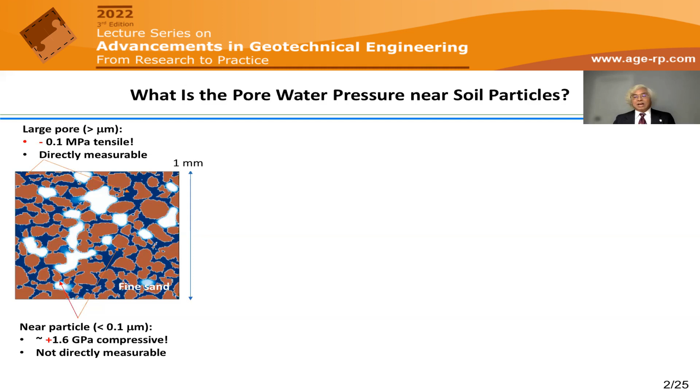But if we look a little closer to the particle surface, what I'm talking about is the scale less than 0.1 micrometer, things are very different. There, the pressure could actually be very high and compressive, and it really doesn't matter whether it's saturated or unsaturated, the pressure is in a region that is tremendously compressive. And the most difficult part now is that it's not easy to directly measure.

Now I'd like to give you some perspective about the magnitude here. On the compressive side, I'm claiming that the pressure could actually be very high, 1.6 gigapascal. So let's get an idea about how big that is.

If you look here, I illustrate it as a Mariana Trench under the ocean. We know that the deepest a vehicle can go is around 11,000 meters. So the pressure there could be very tremendous if you imagine being there. To put it in scale with Mount Everest in the Himalayas, which is 8,848 meters, even though that depth is below the ocean, the pressure is still very high. How big is it? Let's do some simple calculation using hydraulics.

The water pressure that we all define and use is basically, below water under hydrostatic condition, the unit weight times the depth. In this case, unit weight of water times the depth, which is around 11,000 meters, gives us about 108 megapascal.

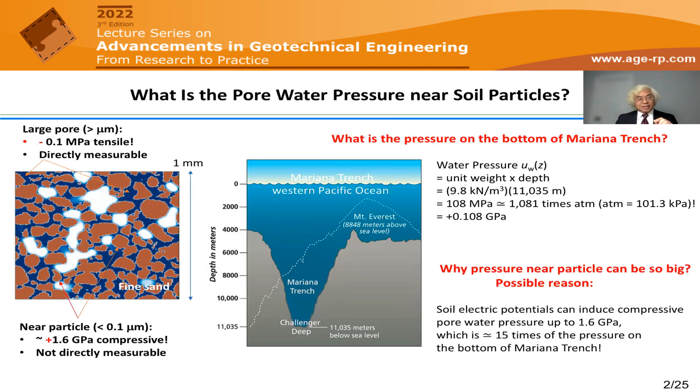So what I'm saying is that if you go out to your garden and take soil with moisture, the pressure near the particle surface - it doesn't matter whether it's saturated or unsaturated, silty, sandy, or clay soil - could be as high as 15 times more compressive than the bottom of the Mariana Trench.

So we wonder, why is that? I'm going to explain to you today, and why bother - what are the practical challenges? I'll give you a group of practical challenges that we are all facing today.

The first is, when we talk about soil, we deal with fundamental physical properties. Evidence in the last century has shown that the density of water in soil could be very high, much higher than unity. How high? The evidence shows it could be as high as 1.8 grams per cc.

That means 1.8 times as heavy as free water. This causes a lot of important issues in how we calculate things, for example how we calculate the volume of water.

The other thing is soil water cavitation. We know water, like many other materials in our near-Earth environment, exists in three phases: solid, liquid, and vapor. Water is the only material that can change so freely near our Earth environment - it can turn to ice, melt into liquid, or vaporize into vapor.

So it's important to know the transition - one important one is called cavitation, which means a change from liquid to vapor, and the reverse process is called condensation, where we go from vapor to liquid.

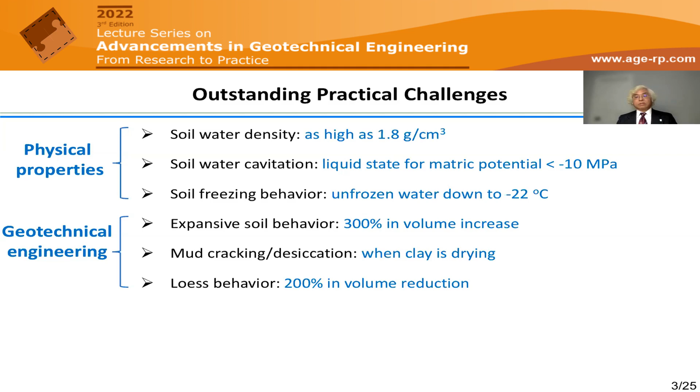The other very important topic is loess. Loess is a yellowish, porous soil widely spread around the world. Sometimes we call it collapsing soil, because upon wetting, the volume can reduce dramatically. Those are the issues that are very important and relevant - in fact it's about pore pressure, and we have not been able to truly tackle the issue from the pressure point of view.

And what we have done is from the conventional point of view to define the pore pressure. The other category I put, just as an example, is the so-called geoenvironmental, which relates to environmental problems. We're concerned about how the water is going to move in soils, in rocks, particularly in clay soils.

Because in clay soil, we have, in addition to conventional flow, a larger surface area, which causes chemical adsorption, physical adsorption. The water not only moves in the larger pores under Darcy's law, but also moves around the soil particle surface, sometimes called film flow.

Biological activity in soils: we know that any kind of bacteria, germs, living beings need a certain kind of pressure and temperature. The pressure we conventionally use in the larger pore may not necessarily be relevant to the real condition at the bacteria scale, the living being scale, which they're very concerned about. That pressure is what we'll talk about. It could be up to a gigapascal.

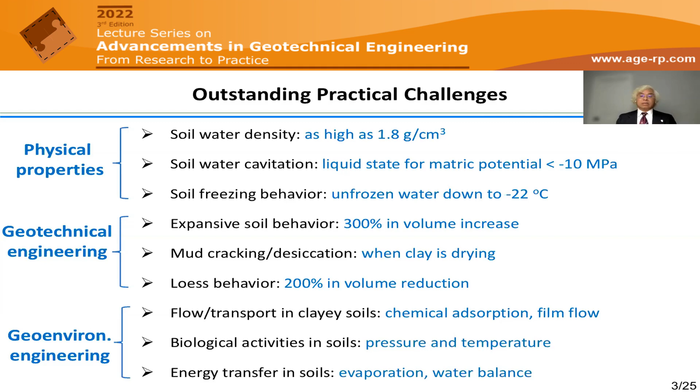Energy transfer in soil, another example: how water energy transfers between atmospheric and subsurface among the soils, evaporation, transpiration, and water balance. So all those are actually very much related to the pressure in soils.

If we look at it more fundamentally, the challenge here is we want to describe the state we have in terms of engineering practice, in terms of natural environment. Most commonly, we use temperature, pressure. In the case of unsaturated soils, conventional thinking is suction, and I'm going to show you that's not always true.

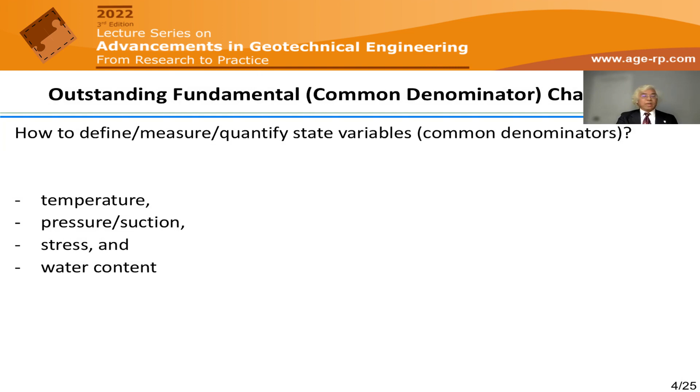Even under unsaturated condition, it could be compressive. And stress, we're concerned about total stress, the stress in the soil skeleton, which we call effective stress. How we assess effective stress also relates to the pore pressure and the water content. In many cases, the soil's state is determined by water content.

So I'm listing three basic fundamental issues that we still, to a great extent, struggle with. The pressure and pore water pressure, or water pressure - what we talk about is water pressure is pore pressure. Positive for saturated and negative for unsaturated, that's the conventional thinking right now. And I will show you today that thinking is actually not general. I wouldn't say wrong, but it's not general.

Stress, matric suction - this is one of the things that has been widely used as a stress state variable for matric suction, and how to define matric suction and measure it from the practical perspective. Suction stress, effective stress, and how we can define it, because effective stress is the one we call effective stress - basically it's effective to describe both deformation and strength.

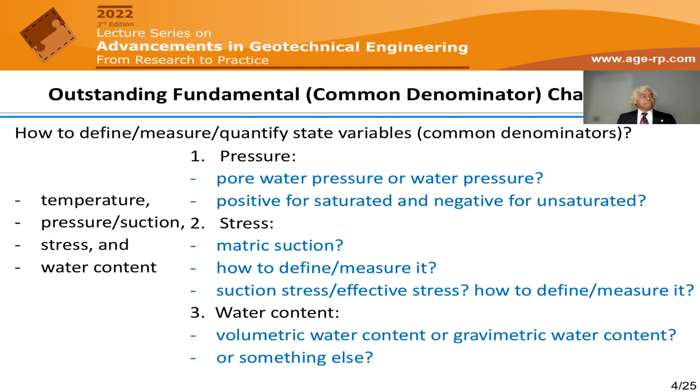So water content - again, water content - we conventionally use volumetric water content, or we can use gravimetric water content. Which one's better? Or maybe you have to use something else. So those are the fundamental challenges.

So let me now go back to what we are doing today, to make it clear how we define the conventional pore pressure. From there, we can look at what will be the better way to do that. So what I show you here is a very typical soil. Soil is a system with solid and liquid, and in some cases could also have air.

In the case of saturated soil, what we traditionally, conventionally measure uses the so-called piezometer. We can insert the piezometer into soil under saturated condition. Likely the pressure here, you're going to see that the head is going to be higher than your atmospheric or ambient condition, so we call it a piezometer. Here I'm talking about hydrostatic condition, no kinetic energy, no movement, just hydrostatic. So the piezometer generally reads what we call compressive, which means bigger than atmospheric pressure.

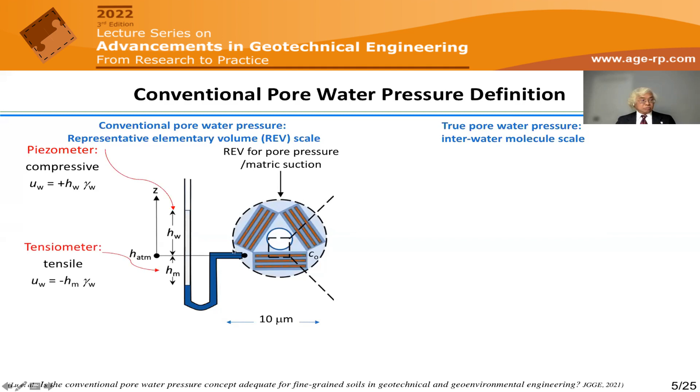Now, if the soil is under partially saturated condition, very often if you measure that, it's going to have a deficit - we call it a tensiometer. This means it's going to be lower than your reference atmospheric pressure. So those are all measurable, at scales greater than, I would say, the micrometer, even tens, 100 micrometers. So we can measure that one. That's how we define the pressure.

But in cases that are much more general, if we have salinity, if we have a solute in soil, we can also measure the osmotic pressure if we put a membrane there - a semi-permeable membrane, which allows the water to freely move, but impedes the salt because of the size of the semi-membrane. In that case, you can also measure the osmotic pressure, because the salt in soil not only migrates from high concentration to low concentration, but also drags the water from low concentration to high concentration.

Conventional pore pressure is the water pressure in larger pores, which traditionally means greater than a micrometer or so. However, what happens in soil, if we zoom down to the nanometer, to the water molecular scale, what we see there is the particle surface.

Near the particle surface, water actually has two mechanisms interacting with it. The first is the adsorptive mechanism, which is due to the influence of the electromagnetic wave by the soil particle, because water is a polar material and will be polarized. Further away from that is what we call the capillary water.

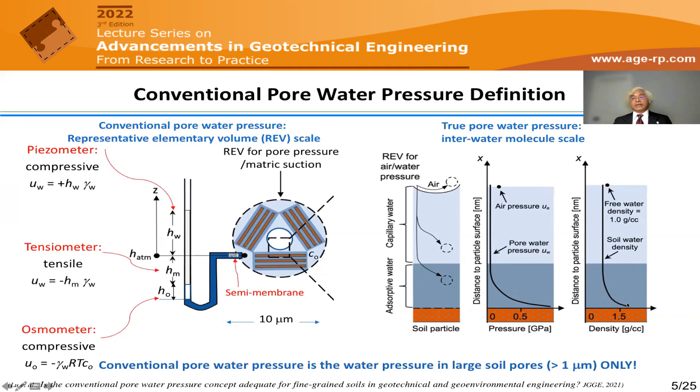Now, correspondingly, because the pressure is so high, reaching the gigapascal scale, the water density near the particle surface - within about 100 to 1,000 nanometers - actually shoots up to be much bigger than unity. In other words, it can go as high as 1.8. So far the experimental evidence indicates this.

What are the difficulties? If you look at how we do this conventionally, again using fine sand as an example, we can measure the air pressure with no problem using current technology. We can also measure the capillary pressure, the pore pressure, using a conventional approach.

However, if you look near the particle surface, the pressure actually changes quite a bit. In particular, the pressure here near the particle surface is at a distance I call X, talking about hundreds or less than 100 nanometers, that kind of range. It's important, though small. For sandy soil maybe that's not important because the surface area is small, but for clay soil it could be very important.

So the question is: we have a pore pressure, which we call capillary pressure. What about adsorptive water pressure? How big is it? By now we all define matric suction as the difference between air pressure and water pressure, which everybody here probably knows. The popular theory for unsaturated soil is to consider matric suction as the difference between air pressure and water pressure. Is it true? Is it good as the fundamental variable to describe phenomena in unsaturated soil?

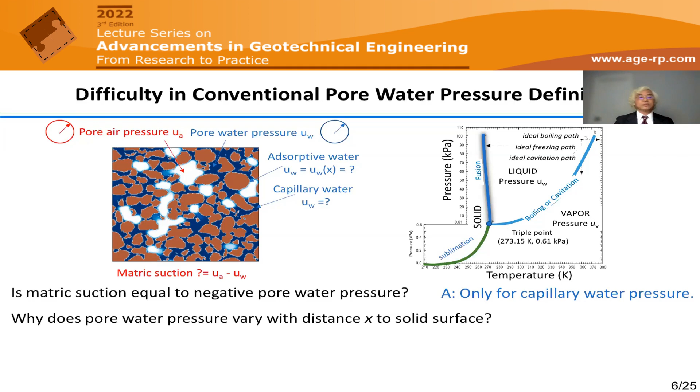Why does water pressure vary with distance to the particle surface? This is because of the tremendous strong electromagnetic field surrounding the soil particle. This can be further divided into different mechanisms, such as hydration and van der Waals force, and so forth. The answer is because we have adsorption in addition to capillarity, and that is why it very much depends on the distance to the particle surface.

Can we use matric suction for water phase change? The answer is no, because matric suction by our definition relates to the larger pore, air and water. But the basic physics is that what dictates whether water is ice, solid, liquid, or vapor is not the pressure we conventionally talk about - it's what we call the local pore pressure. So the question is how we determine the local pore pressure.

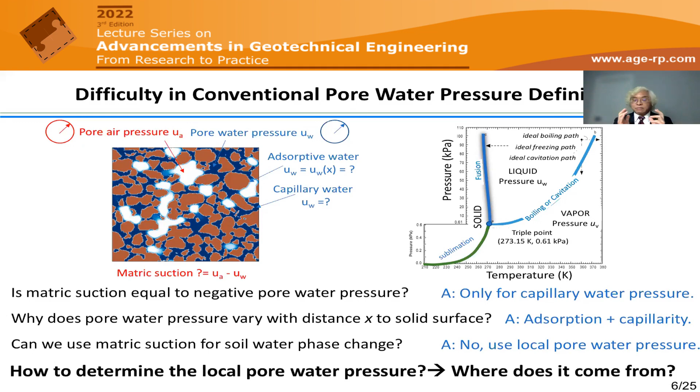Can we do that? I'm going to share with you today that in the last decade or so, we've had a series of breakthroughs that allow us, to a degree, to tackle that problem. We now have a very clear way to define and quantify that.

So let's come back to the phase diagram of water a bit more carefully. In fact, it's not simply just three phases. If you look at pressure and temperature - temperature here in Kelvin, pressure here in kilopascals - here is the liquid part, here's the ice part, here's the vapor part.

In this area, sometimes called the triple point, below the triple point somewhere in this region, water is in the so-called metastable state, which means it can be liquid or vapor. It really depends on other factors like purity and so on. That's called metastable, and it makes things a little more complicated.

So the pressure in soil can conceptually be divided into two parts. One is due to capillarity, which we can measure using convention. The other is due to adsorptive pressure. This adsorptive pressure is my focus today - I'll share some breakthroughs that let us quantify it experimentally and theoretically, very well, for any soil.

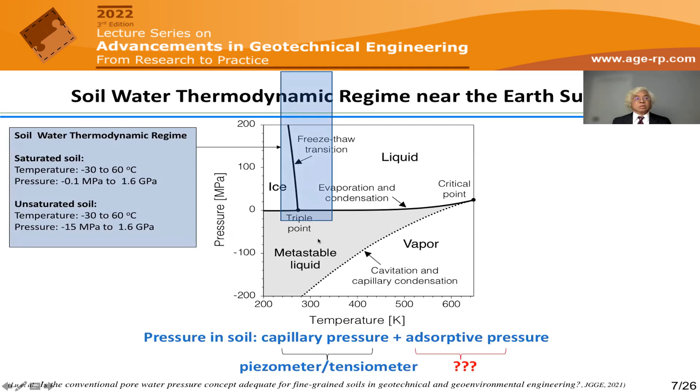Now let's look at what concerns us in the near-Earth environment for all of us in geotechnical and geoenvironmental areas - this is the area where temperature is subject to change, as well as pressure. So we see that we have to concern ourselves with ice, with liquid, and also with the metastable state that can eventually go to the vapor phase and so forth.

I'm going to use an example to illustrate this local pore pressure concept due to adsorption. So I did a thought experiment - say we can have a martini cup to have a punch to drink, but the scale is very small, the cup is micrometer scale. Scale is everything here, because when you go to the micro, sub-micro scale, molecular force starts to take over, compared to gravity and other forces.

So let's define what water pressure is. Water pressure is an average of inter-water molecular forces per unit area - that's how we define it. So we have to define water pressure down to the intermolecular level.

Why we want to define that one is because what dictates the phase relation of whether it's solid, liquid, or vapor is not what we conventionally measure. Rather, it is an intermolecular scale. So it's a component - the water pressure is a component of water potential. Sometimes we call it water potential, or sometimes matric potential. It's basically the energy stored, mechanical energy stored in a unit volume of water.

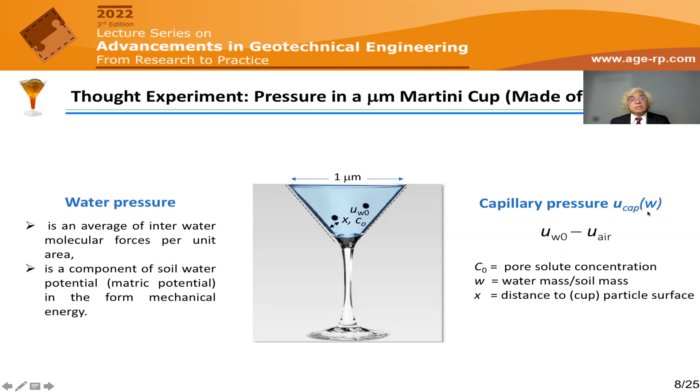Capillary pressure - let's also make clear the definition of capillary pressure that we have been using equivalent to matric suction, which is not. So capillary pressure basically is the pressure difference between water and the air. That's how we use it, because that can be measured.

Now, if I were concerned about the pressure near this 1 micrometer of a soil cup, here, let's say a certain distance I call X, what is exactly the intermolecular pressure? The intermolecular pressure actually could be divided into many parts that can cause that one.

We can have the osmotic part, because you change the salt - the osmotic part is because of the salinity that we put in. We can also have the so-called electrical double layer, because the particle surface, most clay particle surfaces have a negative charge oriented toward the particle surface. Then we form the electrical double layer. When the water molecule goes there, it's going to change the pressure locally.

But that is due to this electromagnetic field. We can have so-called van der Waals - that's another type which is clearly understood in physics, again due to this electromagnetic imbalance there. And we can also call it hydration. Hydration is due to the oxygen, hydroxide, and those kind of soil compounds - they can also attract water, orientate water. So all these are electromagnetic underlined here, electromagnetic in nature. However, they convert to water pressure near the point where we are concerned about.

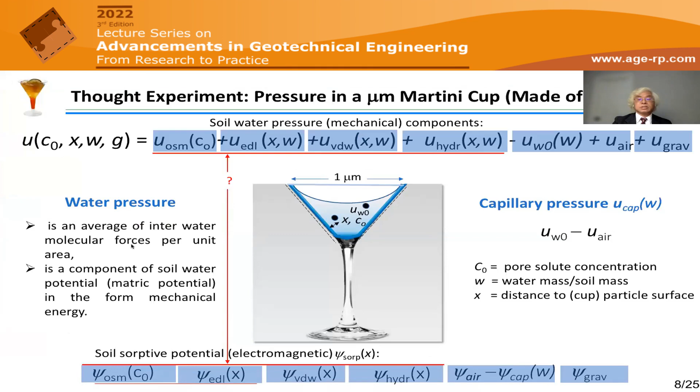The big part of that is the adsorption-induced pressure. We all know that sandy soil behaves differently than clay soil, whether saturated or unsaturated. In fact, the major difference is because of adsorptive pressure, because adsorptive pressure exists whether under saturated or unsaturated conditions - they all exist.

So that is something very important to understand: the adsorptive pressure, how to quantify that. Because it actually originates from a series of electromagnetic fields. Specifically, it comes from osmosis, the electrical double layer, van der Waals forces, and the so-called hydration. All of this, because it's electromagnetic field, will polarize the water, and the polarized water is going to induce pressure. So we can collectively call this the soil sorptive potential.

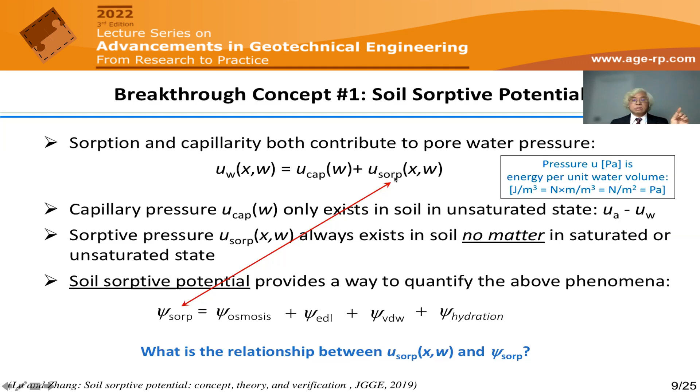So the key here is what is the relation between these two. We define the water pressure in soil as a function of water content and distance to particle surface, and it can be divided into two parts. The capillary part has nothing to do with the distance - it's in the large water, we call it capillary menisci. However, the sorptive part not only depends on water content, but also depends on the distance, and that could be linked to the soil sorptive potential, which has a different mechanism. If we can quantify that theoretically and experimentally, we can answer this question - if you know the soil, you will know the capillary pressure as well as the sorptive pressure.

So one of the breakthroughs I would like to share with you is how we define the matric potential in a much more general way, not just the capillary, but also the adsorption. To define that, you can look at the soil elementary volume here. To be representative, we need to consider the solid, liquid, and vapor. That is something that when we define matric suction, we have to have these three elements in there. So that is something by definition.

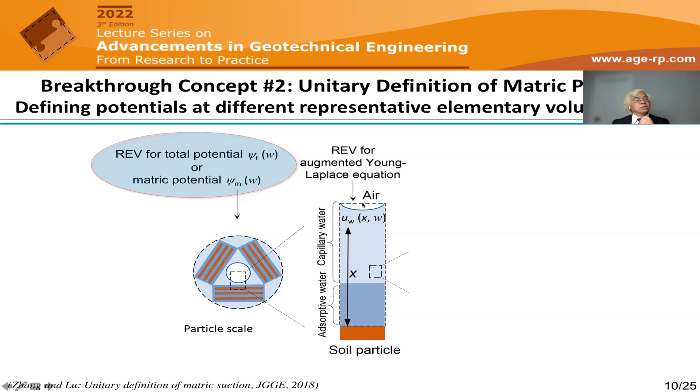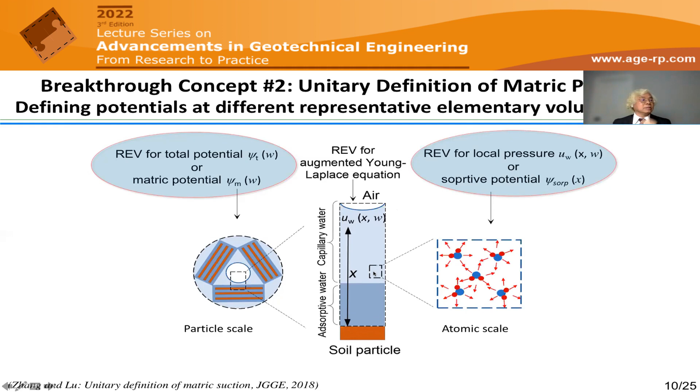However, if you look at the Laplace-Young equation that we typically use to describe unsaturated soil, particularly capillary pressure, it actually only involves the air phase and the liquid phase. Further, if we look at the local pressure, the intermolecular pressure which determines the water phase, as well as many soil properties, it's actually at a much smaller scale - an intermolecular scale. So we have this challenge because, by definition, some of these concepts are at a much larger scale, some at a small scale. The key is, what is the relation between these two?

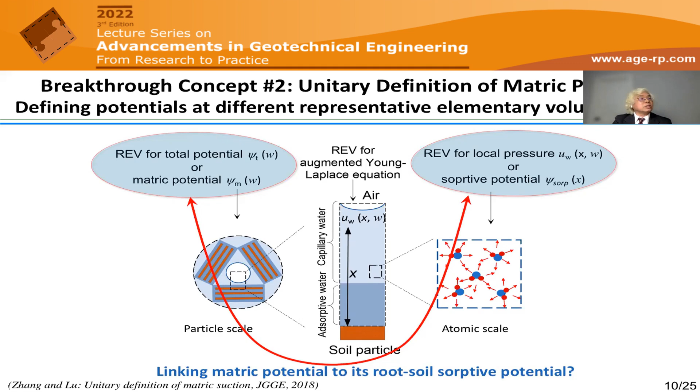We can establish it by what we call local thermodynamic equilibrium. This means if we look at a small particle and water, when they reach energy equilibrium, at every point the total head, or total potential - the water potential - has to be the same, although it could be in a very different form. Near the particle surface, you can have electromagnetic effects, much more polarized water, inducing higher pore pressure. Away from that, you get reduced pressure, even negative pressure. However, the total potential is the same. It's just like gravity - we have a gravitational elevation head and a pressure head that can change, but they have the same total head. Here, the concept in the local sense is the same.

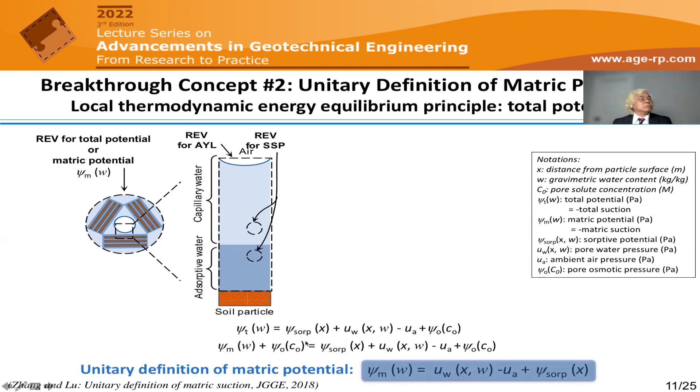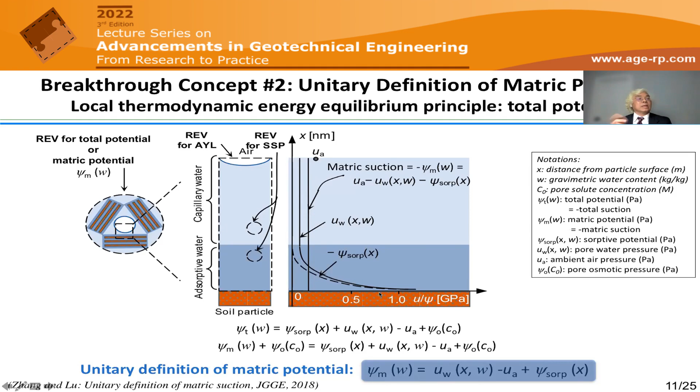So if we apply energy equilibrium, we find that the matric potential leads to the energy being the same everywhere. The matric potential has two components: the capillary component and the adsorptive component. Quite straightforward - if you look at the pressure under the same total potential or matric potential, whether it's away from the particle or close to the particle, it's the same constant. You can divide it into two parts: one due to the capillary part, the other due to the adsorption part. That is maintained, but if you add the two together, you get that constant.

So here we have this relation between the matric suction, which has two components now - the capillary component and the adsorptive component. And again, we can define the water pressure. The water pressure not only depends on how much water you have in the soil, but also depends on where you are - close to the particle surface or not. Again, this can be divided into two parts: the capillary and adsorption parts.

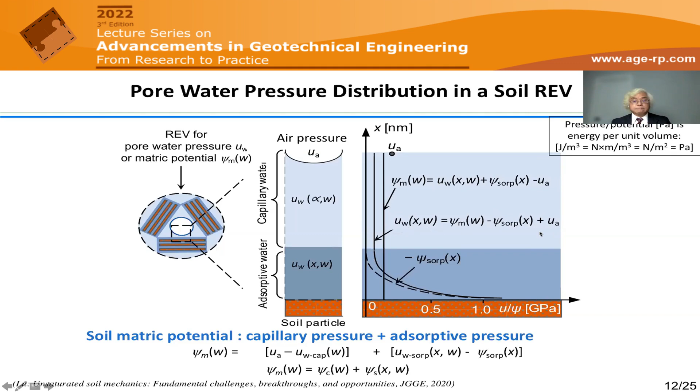How to determine that one? That is one very important breakthrough, breakthrough number 3: now we can precisely and accurately measure that. So how do we measure it? We don't directly measure pore pressure, we measure the total potential, or what we call the soil water isotherm.

Here's a device called the vapor sorption analyzer. We control the humidity and measure the relative equilibrium water content in terms of gravimetric water content.

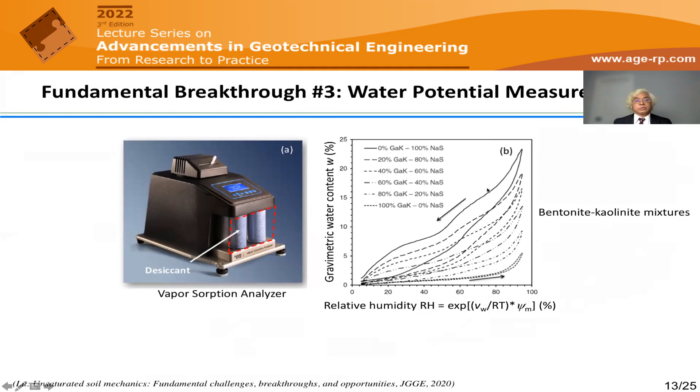Here is an example using a mixture of bentonite and kaolinite. You'll see that in wetting and drying there's some hysteresis, depending on the soil type. The more expansive the soil, the more hysteresis. But basically we can measure the equilibrium condition, determine total potential, and use the relation I just showed you to quantify the pore pressure.

Once we have the experimental isotherm data, we can unambiguously divide it into two isotherms: one due to the adsorptive isotherm, the other due to the capillary isotherm. The capillary isotherm is what we use to get particle size and pore size distribution, and the adsorptive isotherm is what determines the pore pressure.

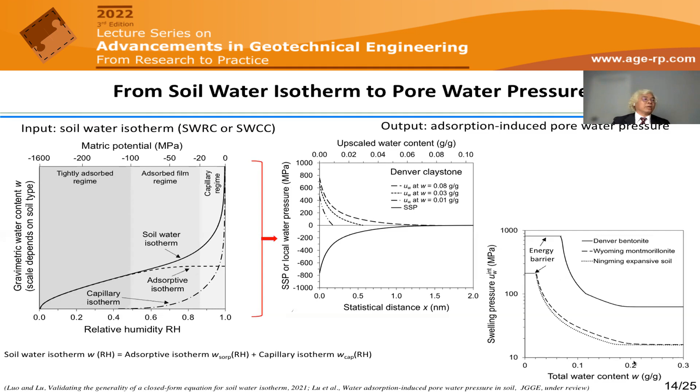Let me now share with you some of the impacts on soil properties for our discipline.

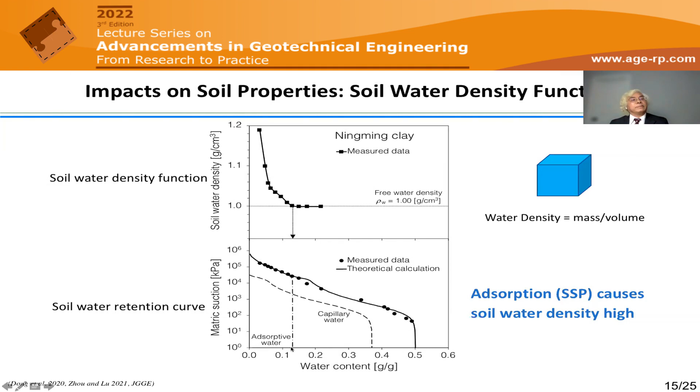The first one is soil water density. We've been using soil water density to define head, to define many quantities, to calculate volume — but in fact it is not constant. Here's an example with some expansive clay: the water density can actually be much higher than 1 unit. If you measure the soil water retention curve, it can be divided into the capillary water retention curve and the adsorptive water retention curve. In this case, the adsorptive water could be greater than 0.1, so the water density can be tremendous.

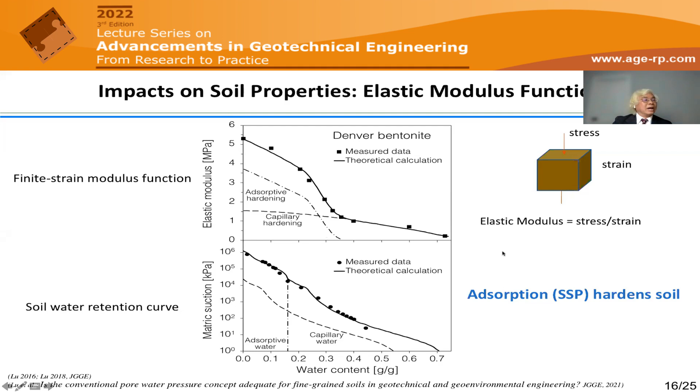Another example is elastic modulus. We know that when clay soil has a lot of water it becomes softer, and when dried it becomes very hard. Again you can see the soil water retention — this example is for an expansive soil, showing the adsorptive part and the capillary part. Correspondingly, you can see the modulus change: there's hardening due to capillary action and hardening due to adsorption, depending on the water content. It's very important that we can now use this concept to quantify the role of each in terms of the property.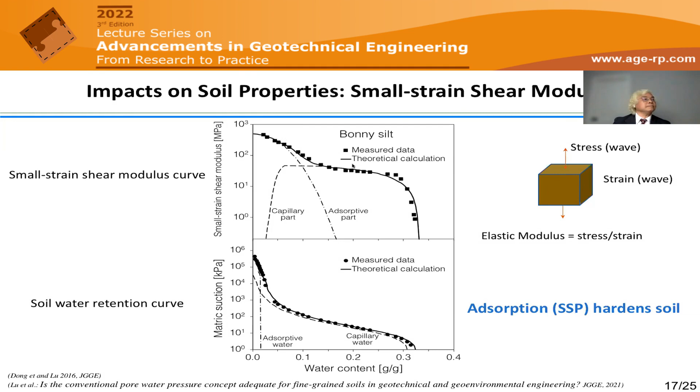Another example is about freezing. As we know, water in soil doesn't just freeze at 0 degrees — a great portion of the water gradually freezes until somewhere around minus 22 degrees, where the water structure fully changes into solid. Somewhere in between, there's a depression of the freezing temperature. Again, using the concept of soil water retention, we can divide this into adsorption and capillary components, and directly use this information to precisely predict the soil freezing curve once we decode them.

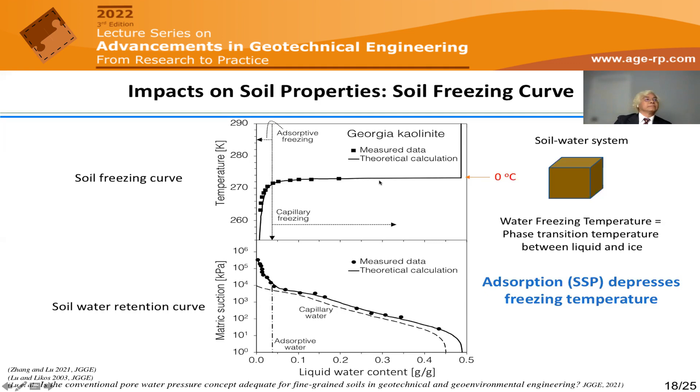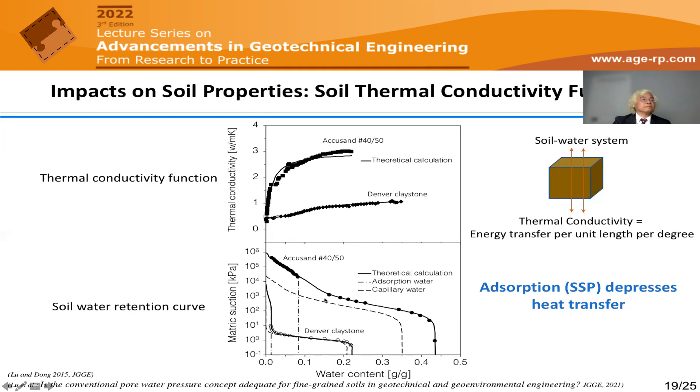Another example I'd like to use is the effective stress. We know the effective stress is the part of the stress that's sustained by the soil skeleton.

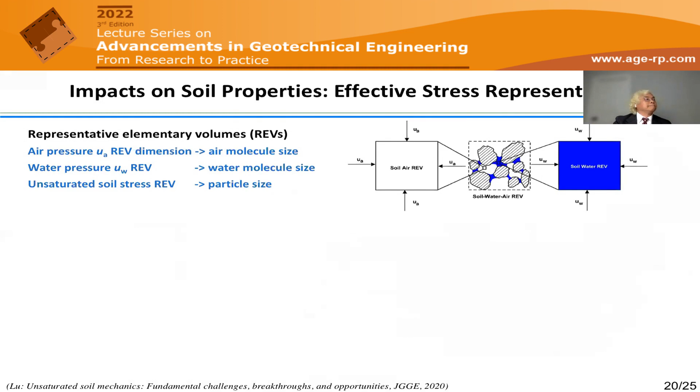So far in the unsaturated community, we have quite a few theories. One is early by Bishop, then Fredlund and Morgenstern, and by myself and my associates. If you look at it at a fundamental level, the Bishop effective stress only considers capillary, because it considers capillary pressure times a dimensionless quantity, which is basically upscaled. So this still satisfies the stress criterion. However, it's only about capillary. If you look at the two independent stress variables, both are incomplete in terms of stress variable because they only use a part of that.

This is the capillary pressure, not the stress. You need to upscale it to make it a stress. You also miss the adsorption-induced component, so it's only part of capillary. But if you look at the suction stress, which I have formulated over the last two decades, that includes both suction stress, capillary stress and adsorption stress, and it's a stress quantity.

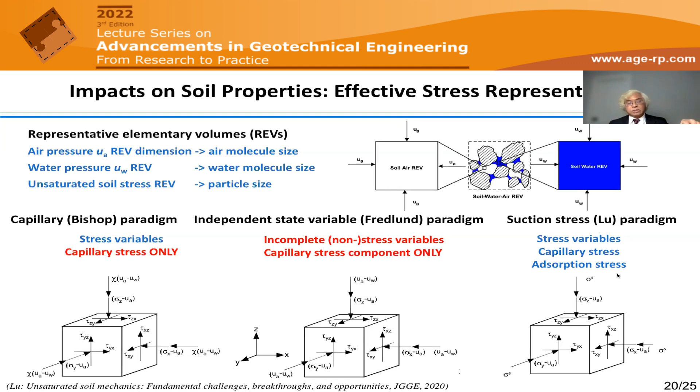Now we can actually trace back fundamentally why there is capillary stress, why there's adsorptive stress, and how we can quantify that. And I'll show you the latest work: we can unify the effective stress under both saturated and unsaturated conditions, for any kind of soil, with the suction stress representation — the same form as the effective stress, like Terzaghi — except that the suction stress depends on your soil. It becomes a constitutive relation.

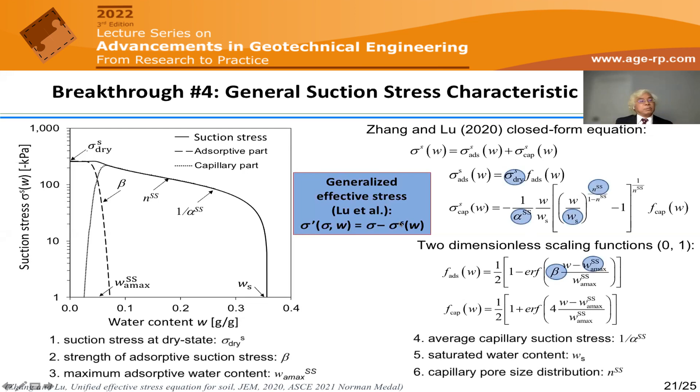Here I show suction stress as a function of water content. We can unambiguously divide, for any soil, the adsorptive part and the capillary part. Add them together and it becomes the effective stress in soil, with a few parameters that have very clear physical meaning.

So I'd like to provide a bit of my perspective for the future. I think it's very exciting for all of us to continue to expand and even use this concept for geotechnical and geoenvironmental engineering.

First, I look at soil properties. We're just beginning to realize that soil water density is not a unit constant. Soil water density in clay soil could be as high as 1.7, 1.8, which means the way we calculate the soil phase diagram is incorrect in clay soil. Recently we've found that for expansive soil, the error due to phase relations could be way over 30-40% in terms of volume. So it's very important to look again at what the soil water density is and how we measure it. There are some methods so far, but it's still very challenging, and that opens a new window for us.

That opens a new window for us to work on. Fundamentally, water density can also be related to the specific surface area. Water cavitation — we deal with water in three phases. In the subsurface, it could be evaporation or condensation. In cold environments, it could be freezing or thawing. It's very important to understand how the water pressure can be defined, the true pressure, and the freezing behavior.

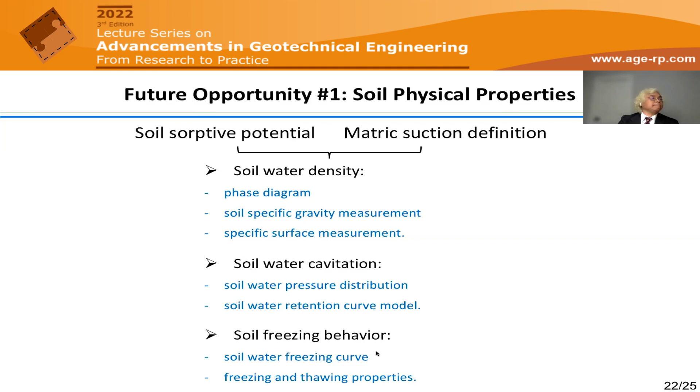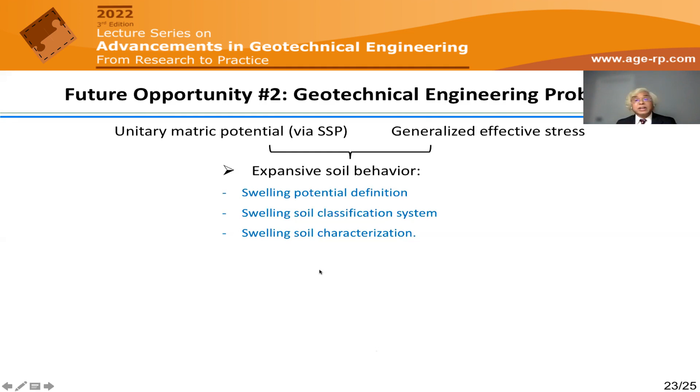Another area I'm talking about is the geotechnical problem of expansive soil. By now, it's all using the so-called swelling pressure, which is basically total stress, rather than looking fundamentally at how pore water pressure changes at the intermolecular scale, inside the lamina, outside the lamina, how they distribute the energy, and how much energy actually contributes to the swelling behavior. So this opens another new door.

Mud cracking, again, comes back. Mud cracking is a widespread problem. If you have a clay liner material, one of the problems for the integrity of performance is creating cracks. Why does cracking occur? Fundamentally, we don't change the total stress — what we change is the suction stress. It's an interparticle stress due to adsorption, more than due to capillary, for clay material. So it's very important to understand mud cracking from this lens.

Again, it's collapsing soil, we call it. In fact, loess does not necessarily collapse upon wetting - the volume could actually be swelled constitutively. The collapsing phenomenon, by and large, is because of the boundary value problem, because of the overburden we have, which causes the failure of the material and post-failure behavior.

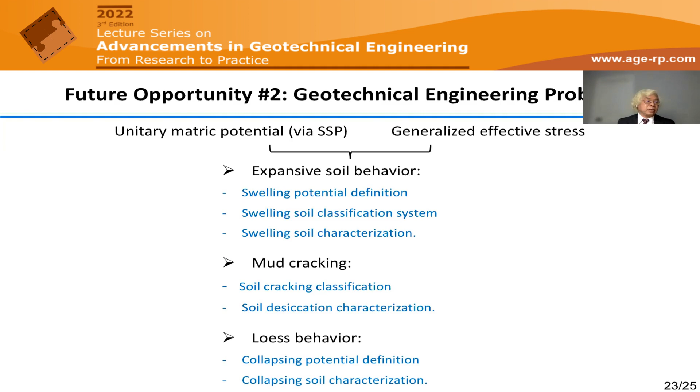But fundamentally, we can look at it from the point of view of how the pore pressure is going to contribute, and I'll show you some geoenvironmental applications here. We can understand how water transports in clay material, including the chemical adsorption. We know that different species absorb in soil differently, but fundamentally it's the same as how water absorbs in soils, because of the interaction between the soil and the polar material.

The water flow in soil, particularly in clay soil, is no longer just governed by capillary water, what we call Darcy's flow or Poiseuille's flow. It can actually be controlled by adsorptive water. So that opens a new channel for us to understand water movement in soils in the future.

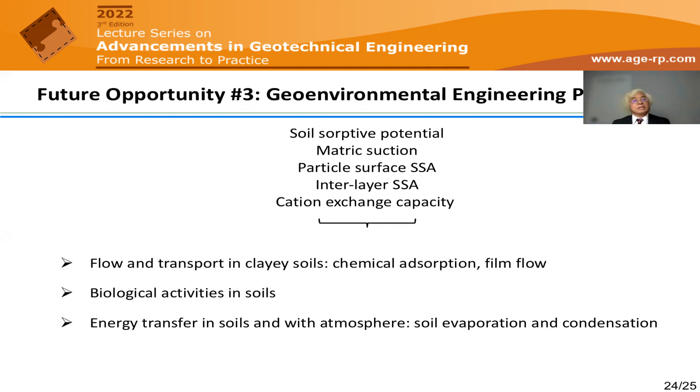Biological activity - temperature and pressure dictate all that biological activity. Are we using the right temperature and the right pressure to understand the biological process? And finally, the energy transfer in soil and how the atmosphere interacts with the subsurface, which is one of the research frontiers right now for many disciplines.

So by now, let me make some conclusions about what I talked about today. The conventional pore pressure that we represent is actually the bulk water, or sometimes we call it capillary water. It ignores the local pore pressure due to adsorption, and it's inadequate for geotechnical and geoenvironmental engineering applications.

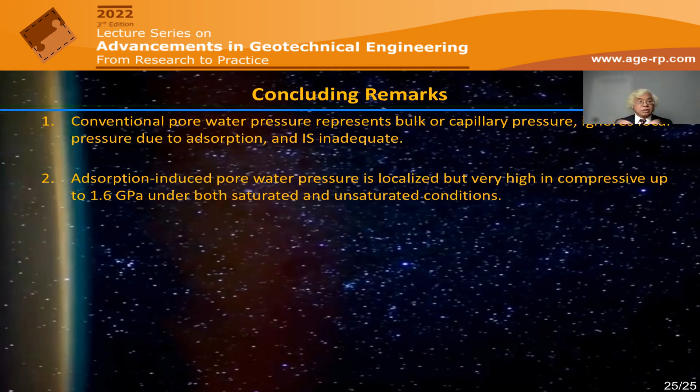Adsorption-induced pore pressure is actually localized but very high in compressive mode - it could be up to 1.6 gigapascals under both saturated and unsaturated conditions. The way to generalize that is how we define the pore pressure, which now has two components: the capillary component and the sorptive component. We can experimentally quantify this for any kind of soil to determine it under any kind of water content.

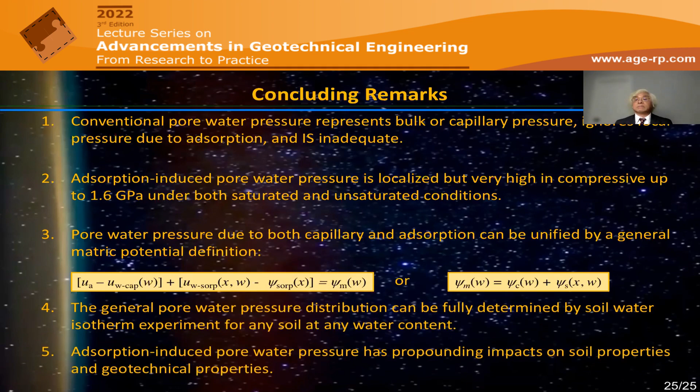Finally, I think the adsorption-induced pore pressure, as I just showed you, has a profound impact on soil properties and many practical geotechnical problems. Thank you, thank you all for your attention.

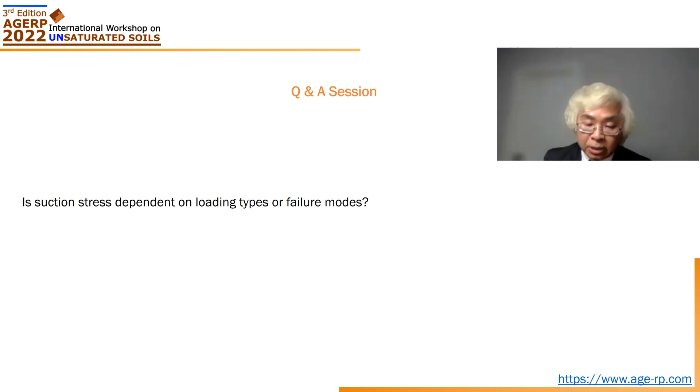Loading type - when you say loading, do you mean the mechanical loading or also the hydrological loading? If you only talk about mechanical loading, it can actually change it - if the loading is to such a degree, it can change the fabric. And then you can change the suction stress, because fundamentally suction stress is interparticle stress. It actually exists both at the contact as well as near the contact. So if your soil is under mechanical loading to that degree, it can modify the contact area, resulting in different suction stress.

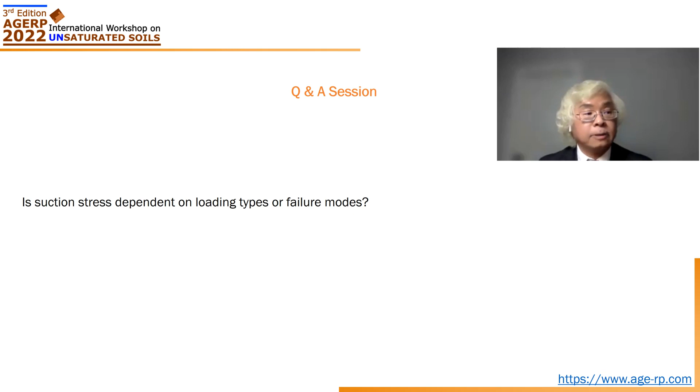The second factor, environmental loading, is one of the leading factors that changes suction stress. That is why in the formulation I have so far, the water content, or you can use degree of saturation, or you can use matric suction or matric potential, as a variable. So it is environmentally important. That is a question that still remains to be researched.

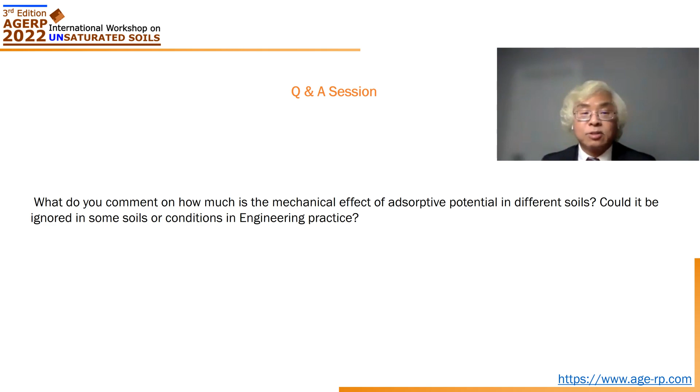But intuitively, I think traditionally we're all concerned about mechanical loading, because a few thousand, up to a few thousand kPa, is what actually causes the change of the structure, both deformation and strength. However, if you look at the environmental factor, the water content change or matric potential change, particularly for clayey soil, the induced stress I call suction stress, which is internal, could be up to 1,000 kPa. In fact, this is the one that under cyclical loading, we see a lot of structure and infrastructure failure after this type.

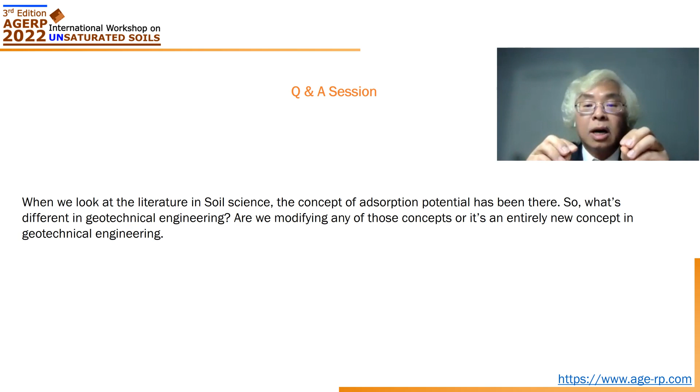Collectively, I'd say it depends on the context. If you talk about kaolin-like material, for example, film water potential is very important, but hydration may not be that important. For expansive soil, it could be very important. So it really depends on what kind of soil you have, all these four components.

I'd suggest you look at a few papers I published. In fact, I put together for the first time all of them in terms of order of magnitude, where they're going to overlap, and what kind of soil you're likely to have for each of those components.

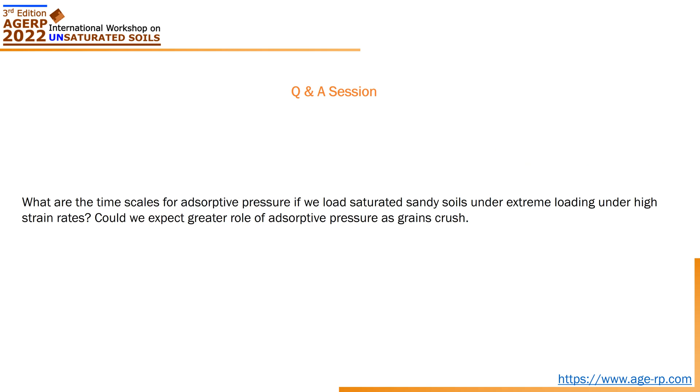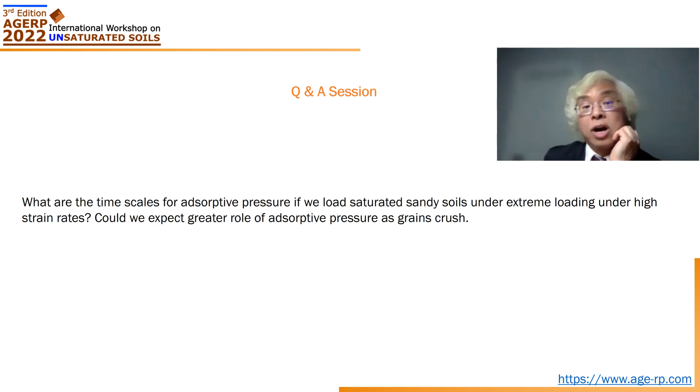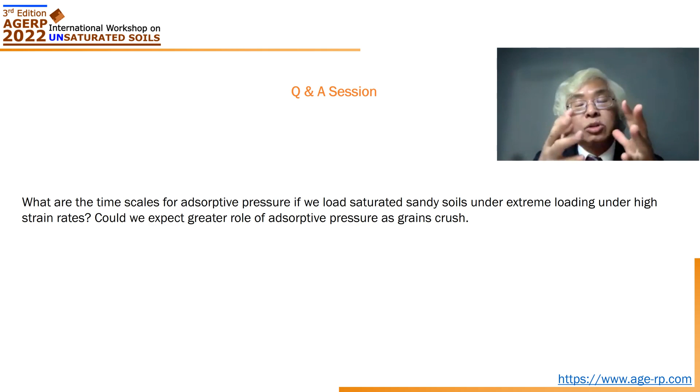The way I look at it is even though the pressure could be tremendous locally, they are self-balanced, which means they're not going to crush your soil grain at all, because the attractive force due to electromagnetic is counterbalanced. So it's not because pressure is tremendous that you're going to crush the material. No, it's not, because it's self-balanced - it's like an action-reaction.

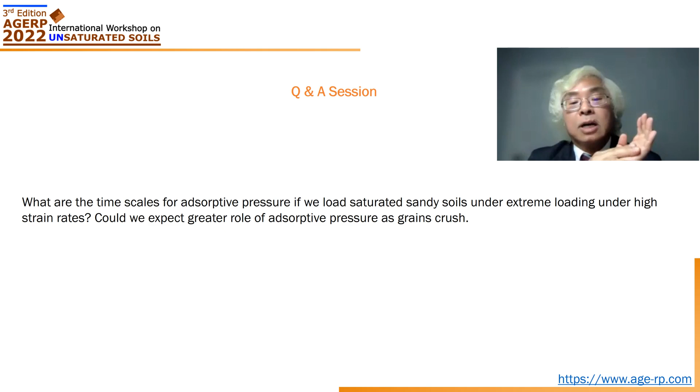So that's why when you go to the garden now and pick up soil, it's sand, still loose sand. But if you zoom into a water molecule, the pressure is a gigapascal. But that pressure does not crush your sand grain, because the action-reaction is self-balanced by a force sometimes called Born repulsion.

I would like to ask a question, Professor Lu - very nice presentation, very impressive. I was wondering whether you could think of a scenario where we could lose or change the adsorptive forces in the soil due to geochemical processes, for example when the chemistry of the pore water is changing.

I think there are many examples. For instance, we sometimes call it sensitive clay - mechanically disturbed, because geologically they form some kind of metastable state due to the physical-chemical adsorptive force. But when we do a mechanical disturbance, the property changes tremendously. They can become liquefied, and a lot has to do with this local mechanical disturbance. By the same token, you can change it chemically. For example, some soil that originally likes water, if you do some kind of treatment, can dislike the water. When they dislike the water, the pressure changes locally very differently, and correspondingly the property changes. So I feel many of these questions can be tackled by the concept here.

Quickly, could be one of these - you mentioned it already with liquefaction, when it was deposited under a saltwater environment and the salt was washed out over time. Yeah, it's an interesting problem, especially when you think about timescales.